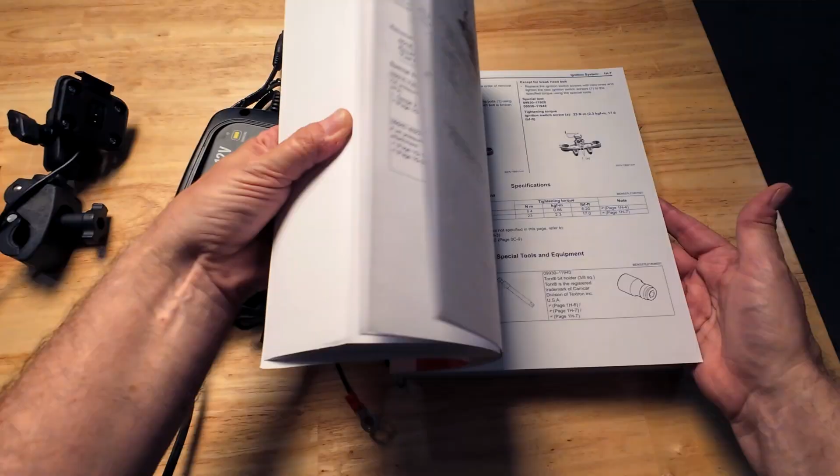First things first, I went ahead and bought the Suzuki manual for the DR-Z4S. Even though it says DR-Z400, this is the manual for the 4S, and if you look through it, everything in there has to do with the new 4S. Not sure why they have that printed that way. It's a $100 manual, but hopefully it's worth the purchase.

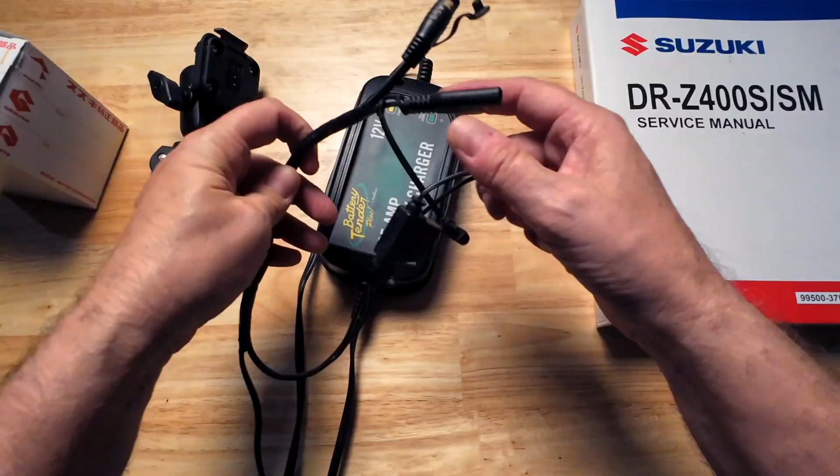Next up, we've got a socket here, an outlet for charging my phone or whatever I want to run off of it. It's going to be a 12-volt DC circuit, and I'll hook that up to the bike, hook it up to the battery, so we got power up front. This connection has two things on it: an adapter that's a power source to my battery tender, and also a power source to the heated gear that I wear. I do ride in the wintertime, and that keeps my heated gear nice and warm.

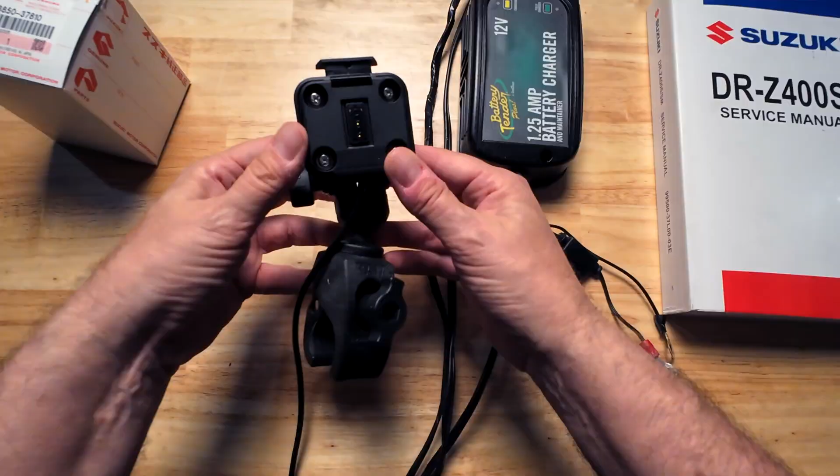Another mount we're going to put on and hook up to the battery is for my Garmin XT Zumo. The thing you need to remember about this mount and the XT Zumo is it's wired straight into the battery, so as long as the Garmin is mounted, it's drawing from the battery, even if the bike's off. So you always have to remember when you turn your bike off, you've got to disconnect the Garmin. It's kind of a nuisance, but I enjoy the Garmin. I know how to use it.

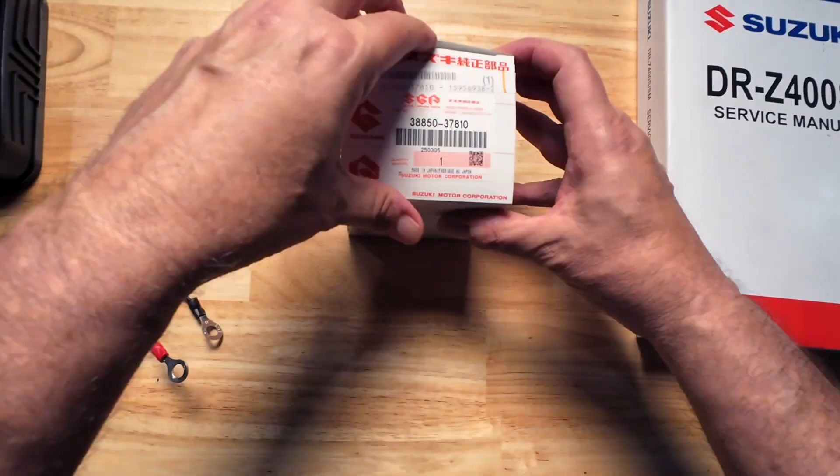Now last here we have what I bought from Suzuki as an accessory for the DR-Z4S, and that's the charging outlet or power outlet. So let's look inside.

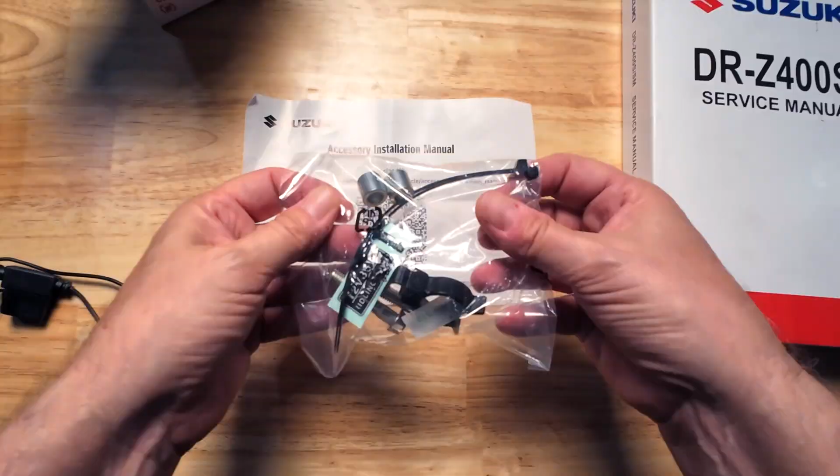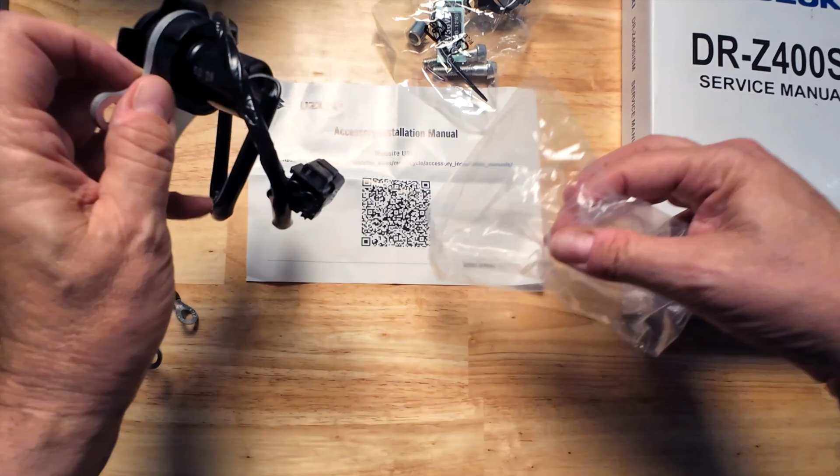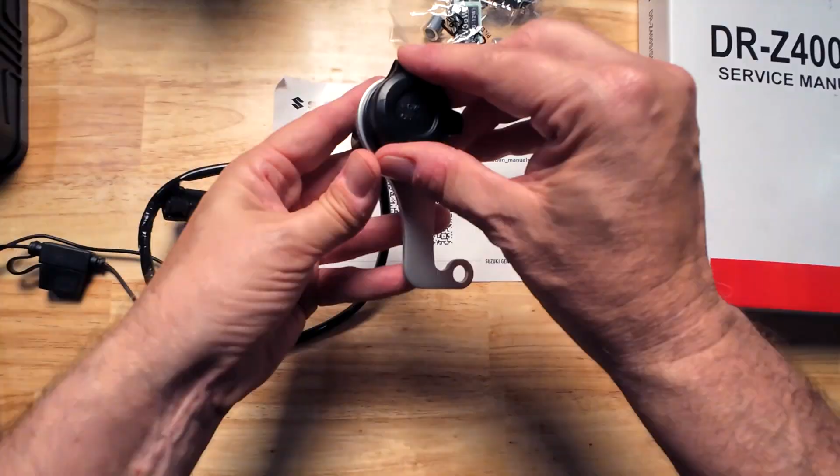Looks like we got a QR code for the instructions. Got a pack here of bolts that are going to go in the riser, and then the actual outlet here, the part you're paying for. This looks like it's going to be a plug and play type of connection. We're going to mount this on the bars. It's just the old school kind of cigarette lighter plug, something in there. It's going to have an adapter that has a USB-C or USB port on it.

Pretty straightforward. So let's go ahead and scan this in and see what we get. So we got a little bit of an issue here, let me show you what happens.

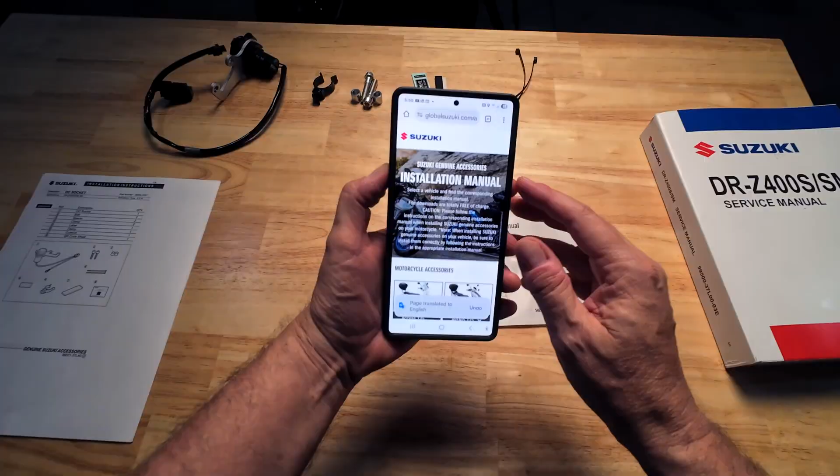So when you scan the code, this takes you to Suzuki's website with the instruction manual, and you're supposed to find the new DR-Z4S. Well, as we go through our list here, there is no DR-Z4S. So something you all might have to do that I did, I had to get in touch with the dealership that sold me the bike, and they were able to get me a corporate link to get to the right information, and then I was able to print out the instructions.

The first page is just going to give us a parts list. The second page is going to show us a little bit about the tools that we need. Looks like we're going to need a 5mm and 6mm hexagon socket.

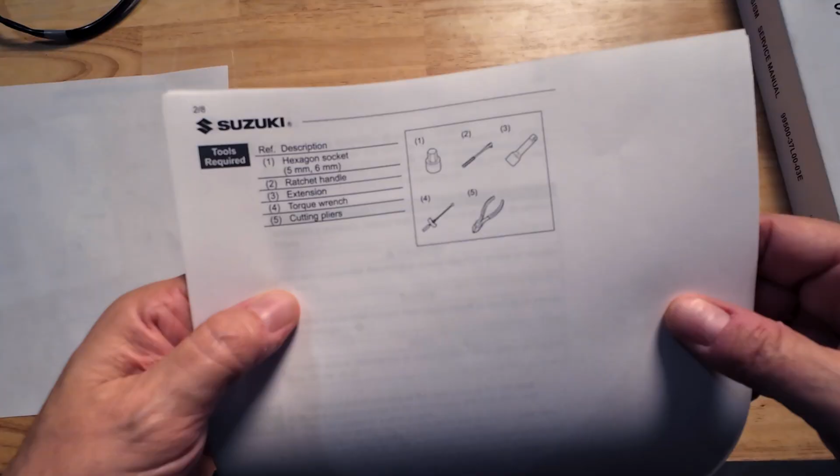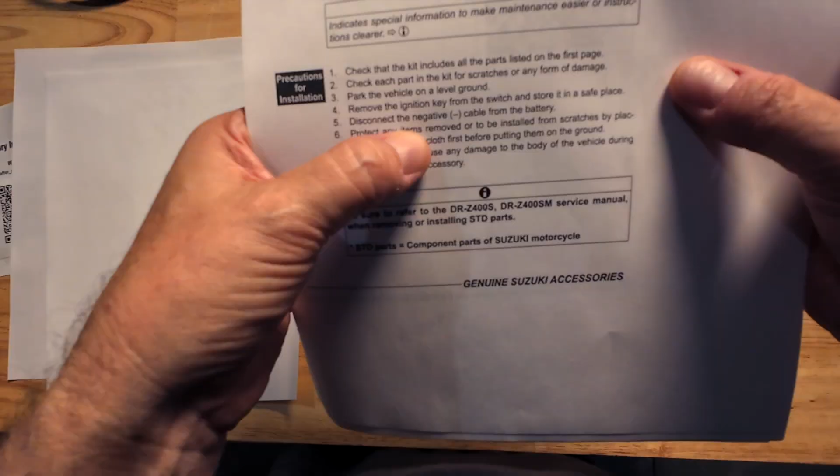The next page is going to tell us to disconnect the negative cable on the battery. I'm not going to tell you that you don't have to do that. I'm doing that because I know I'm going to hook up some other things as well, but that's just kind of a precaution for installation.

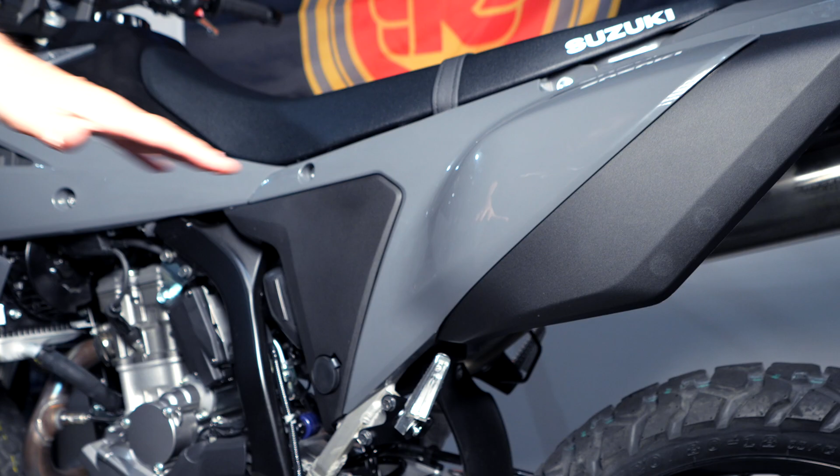So the first thing we want to do is get this panel off and get to the battery. To do that, we've got to take this black panel off. There's a little pull tab here, we've got a key unlock, that just pops out. You can see I've got my registration in this little handy pocket, and you got some tools here. But what it does is it exposes this final bolt.

So you have 3 bolts here that you're going to take this side panel off with. I've got my 8mm socket here, and I put an extension on just because it's hard to get in there. So let's go ahead and loosen these and take these off.

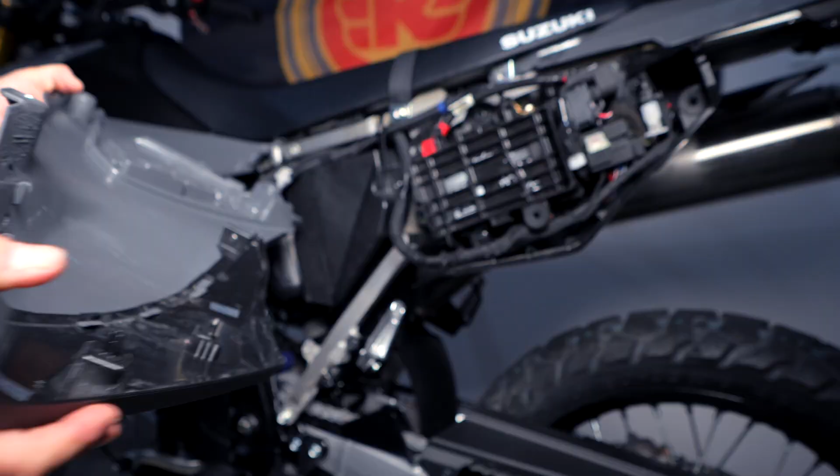So we've got the 3 screws out, and this is still stuck. I looked and it looks like there's 2 little tabs here, so we need to just pull this straight off. It comes out fairly easily, but you can see these tabs here, they go straight in these 2 holes here, and you've got your battery right here.

All your electrical work, your fuse work right there. Some people have got a little bungee cord here that you can tuck wires underneath. I think that's aftermarket, it didn't come on this bike.

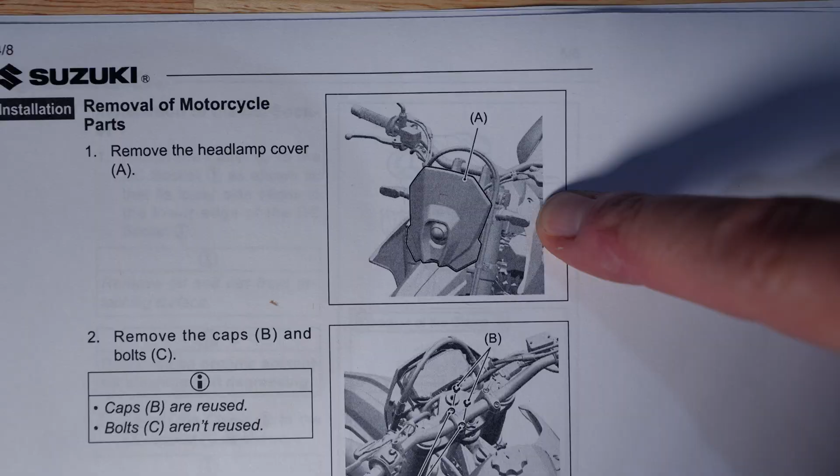Up next, they're asking us to remove the headlight cover. I think we've got 4 screws that attach it. This is why I got the service manual, it's got more information. You can see the headlamp cover here, it's got an attachment on top and then 2 on the bottom. So that'll give me an indication where to look on the bike.

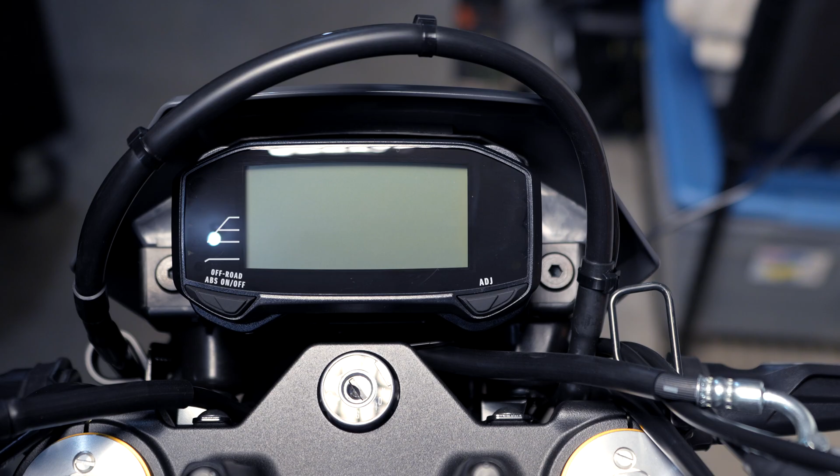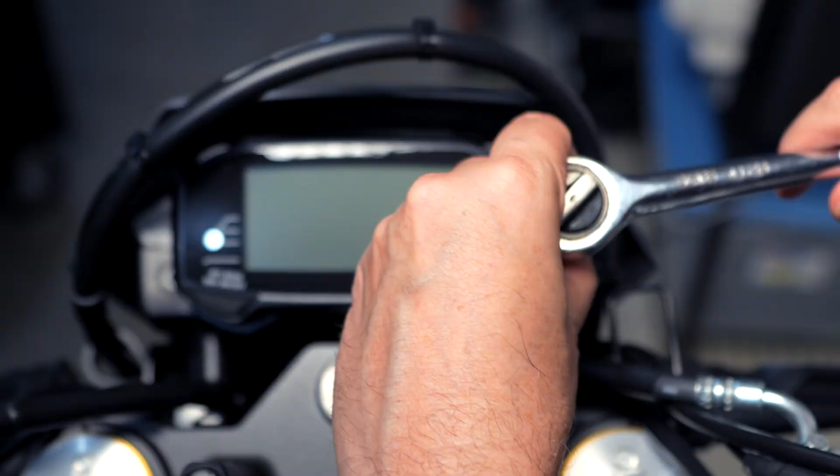So we've got 2 bolts here that we're going to take out, and this is a number 5 Allen socket. We got 2 more to go, one here and one on the other side. And again, this is a 5mm.

This one's going to be a lot easier to take out. They really aren't in very tight. That's going to be a part that we'll probably have to periodically tighten.

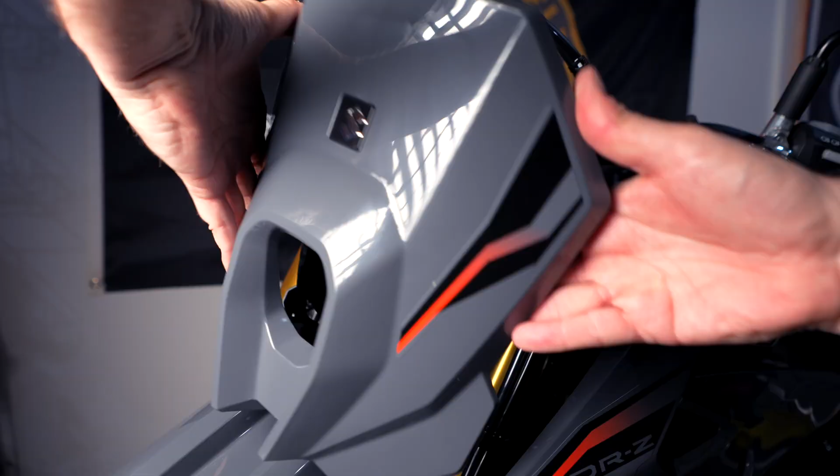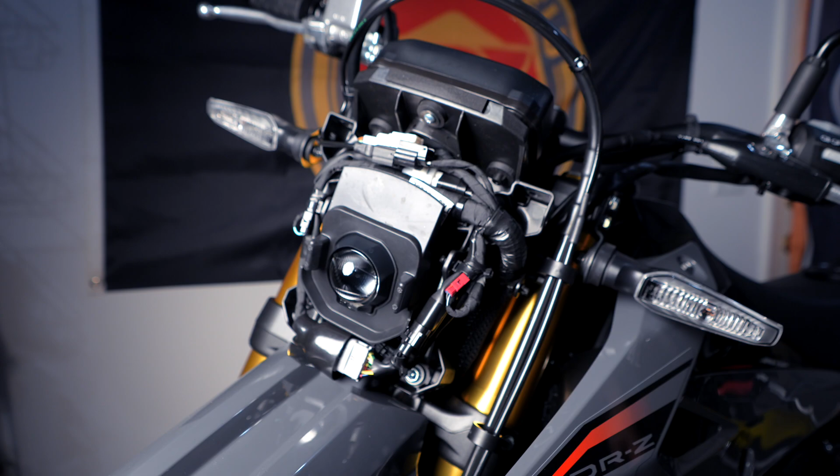Let's see if that just comes straight off. And it does, yeah, just 4 little tabs. Just have to remember where they go back in. But that was pretty simple, straightforward.

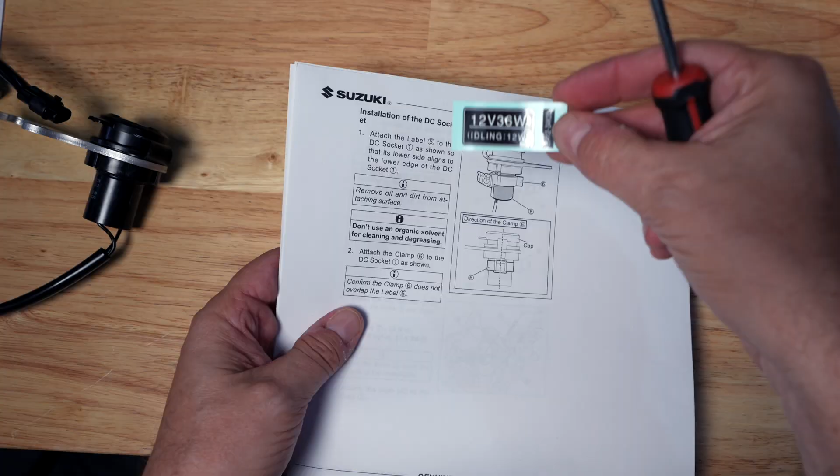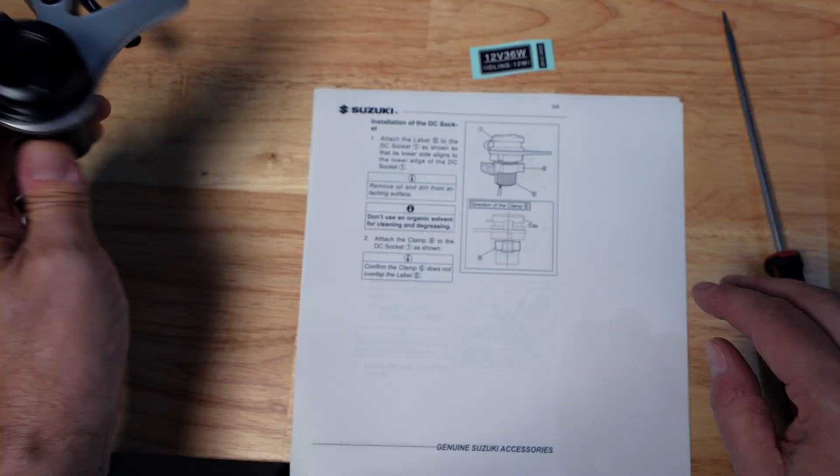Next step, they want us to remove these little plastic caps. We've got a label here saying 12 volt that's going to go right here on the socket, just so we know that that's a 12 volt. And then I believe on the other side, there's this little spongy pad that goes on the other side. So we'll put those 2 on next. So let's follow the diagram and pop this on.

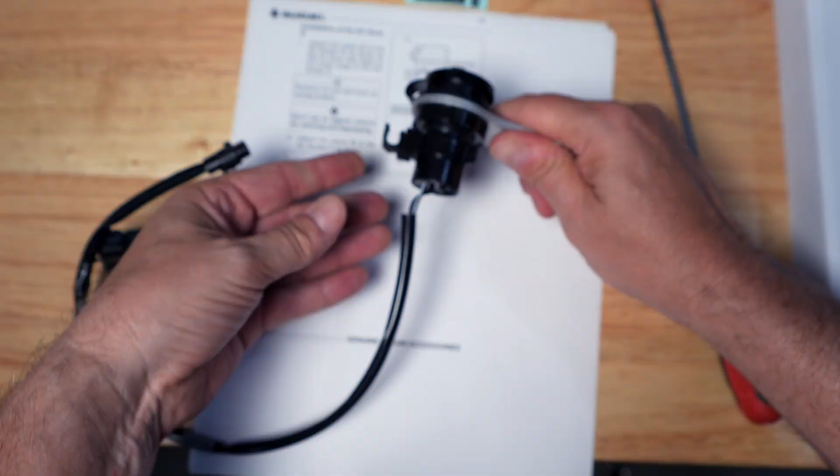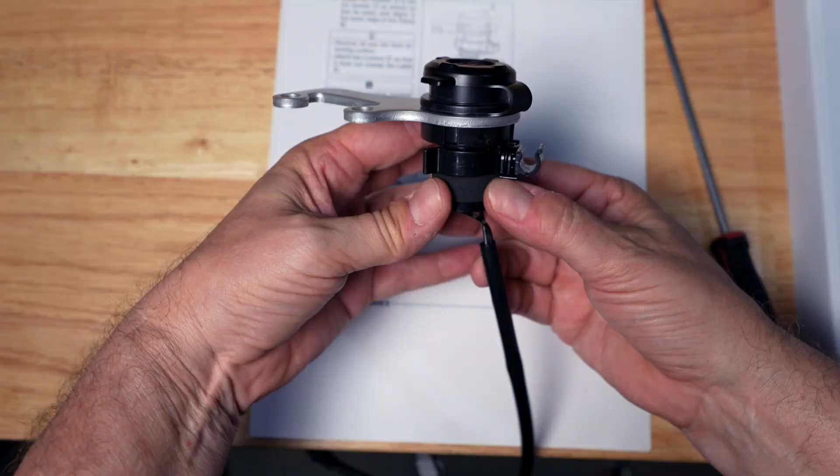Got our label on. Next page, we've got this little rubber sticker, and it looks like we're going to switch it over to the other side and place it right about here. We'll see once we get it put on what that actually does.

All right, up next we're going to install the DC socket onto the handlebar. Here we're going to use a number 6 hex bit socket, and we're going to loosen these 2 bolts here on the handlebars, on the risers. I call them risers, they're just bar clamps.

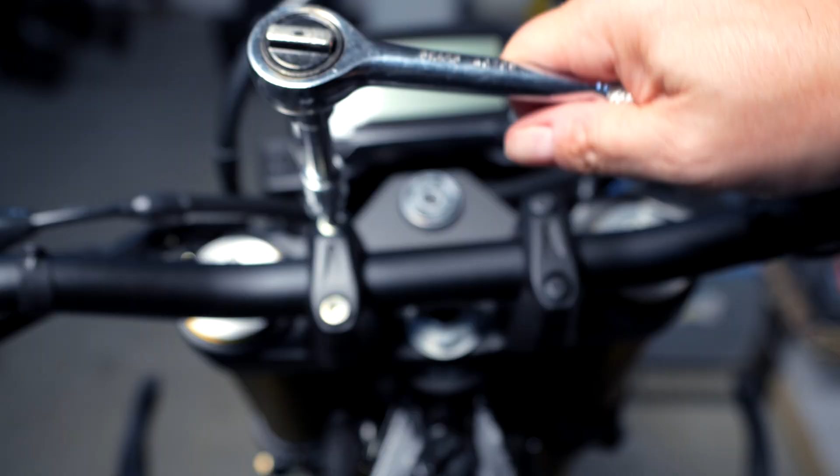Wow, they weren't very tight either. Oh, that one's loose. The other thing is, you can tell there's no Loctite on those. I'll put some blue Loctite on the new ones when I put it back on.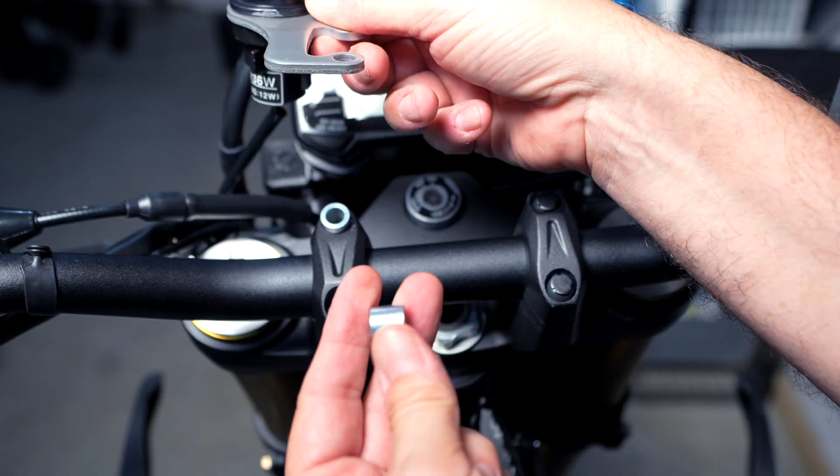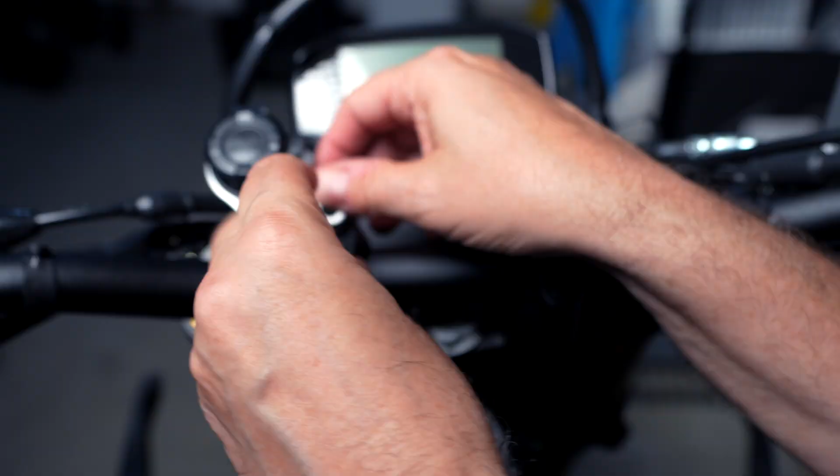So we're going to put these little spacers in, put the bar clamp back on. I'm just going to put one in to hold it without the Loctite so I can get the other one set. See what I've done? You got to look, you got a direction that you got to put it back in. So let's take that back out. It might not matter, but it might.

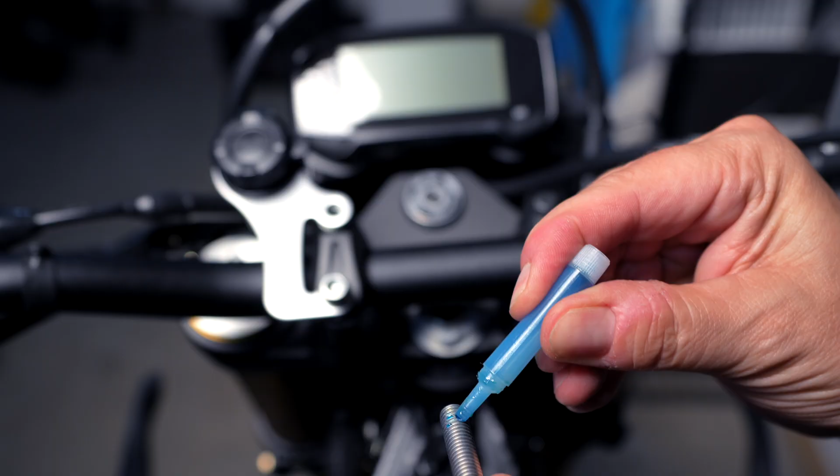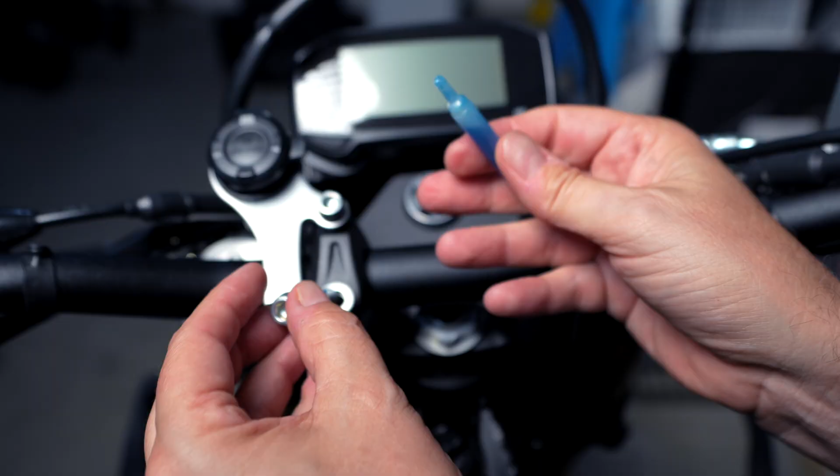Okay, that's there. Here's where I just put a little bit of this blue Loctite on. Doesn't take much. I'll pull this one out. Put a little bit on here. Not going to torque those down yet.

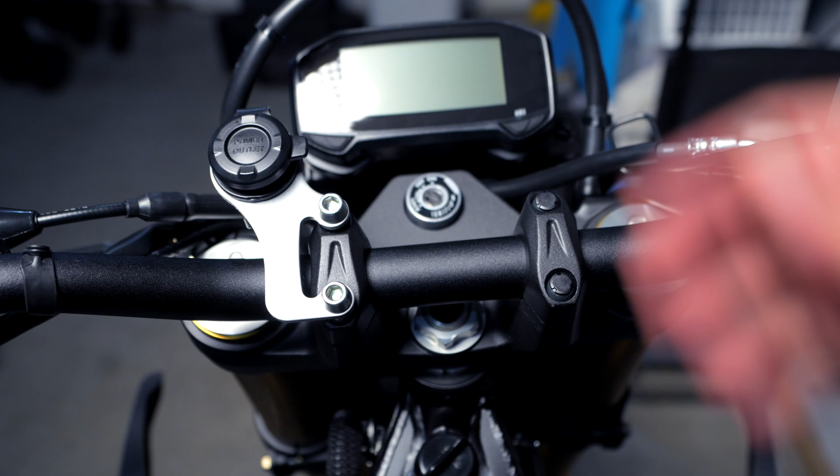I'm going to make sure everything works first. But we got it in place. Let's go feed this wire through where it needs to go and get some power to it. We've got to route this wire through. That fuse is pretty big, so we'll have to see where that goes.

This is what I was curious about. I was thinking that maybe this wire went around it somehow. I wasn't sure what that was for, and then I figured it out that when you open this little cap here, that holds it.

So, do we really need that? I don't know, I guess we do. Maybe it keeps it from flopping around, but that's what that little additional part is.

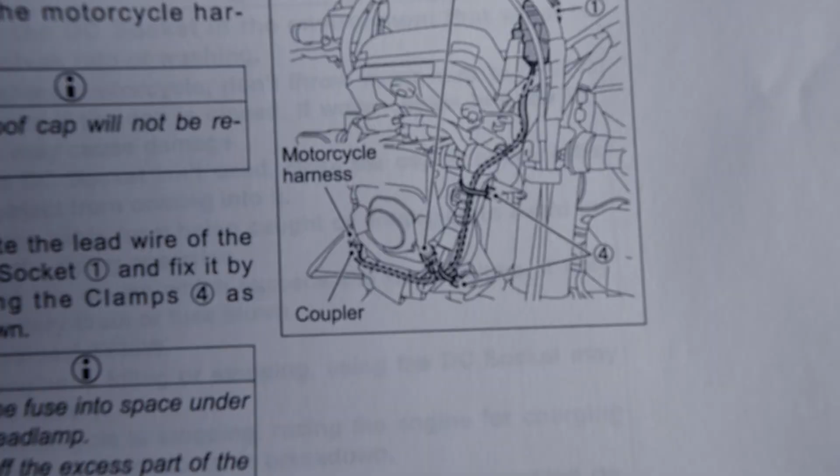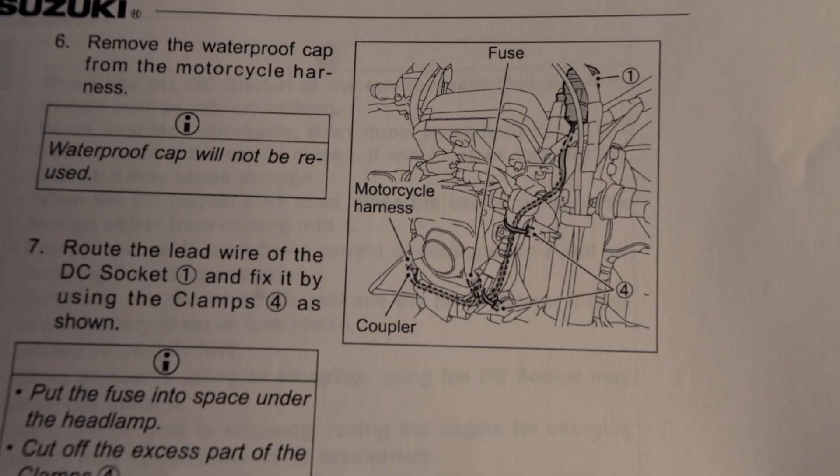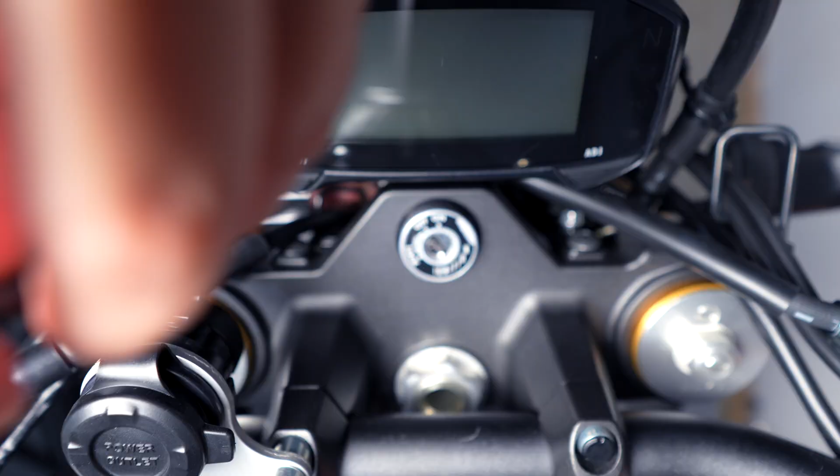I'm going to try to follow their guide, but to be honest it's kind of confusing as to where they're saying to route it. I've got a pretty good idea, though. I think you can figure out on your own where it will fit, where it won't, and the best place to take it for a good tidy appearance. Probably the most difficult part is this fuse is pretty big, and there's a hole going right down through here. Looks perfect for it—I think I can get it through there, and that's where they want you to put it. But I'm definitely going to have to move some things out of the way to do it.

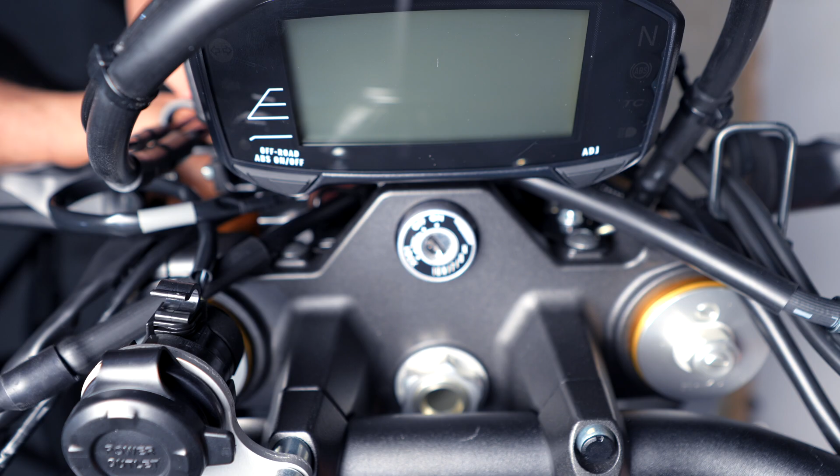I can feel it coming through there. It might have went, actually. Okay, so it made it through that passage.

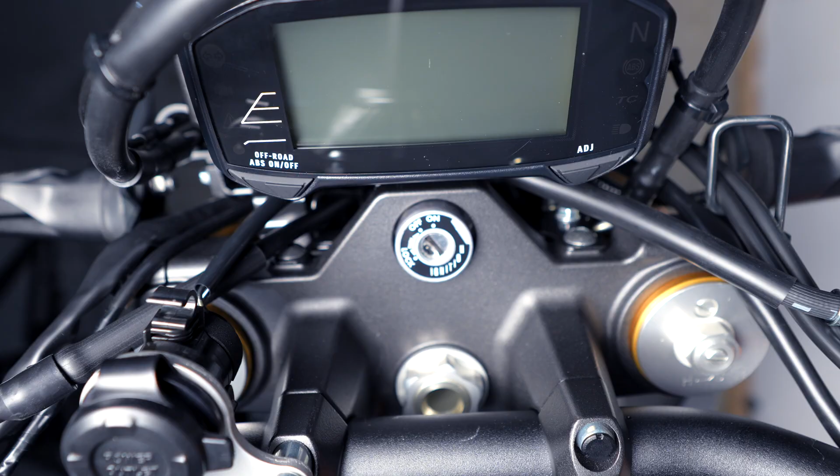I know it looks like a big jumbled mess, but here's our socket. It's running down through here, coming out here—you can see where that's moving. I'll look and see where it goes from there. I'm sure it's going to wrap around, probably go right through here and wrap around to the other side. We'll see—let's move on.

So this is our plug-in right here. It's got a waterproof cap to it, and I don't know if you can see that—there's just a little clip here. Push that down and pull it out, and that's where this is going to plug into. Let's go ahead and plug that in.

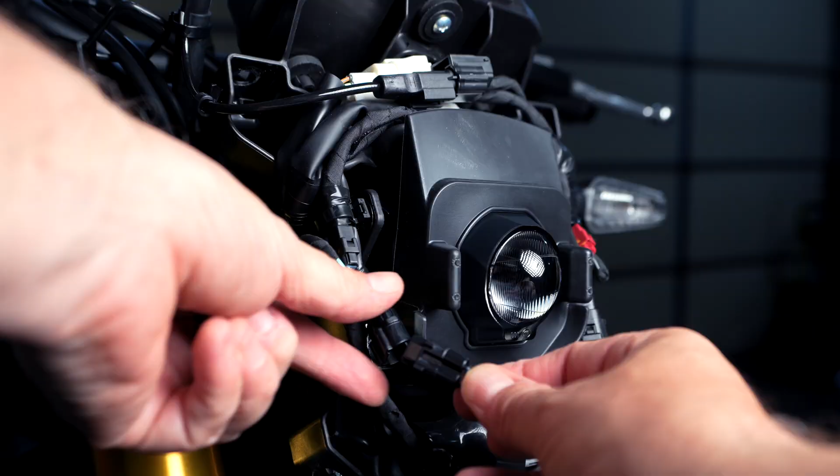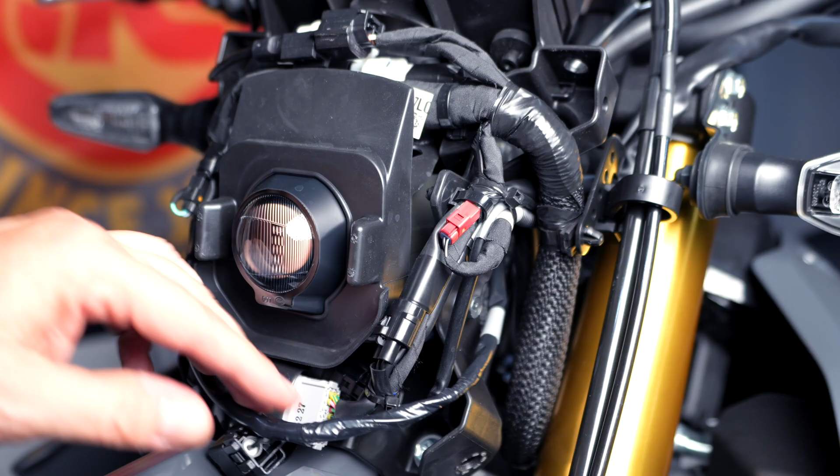Okay, great, so we're all hooked up. Now it's time to just kind of anchor things down. So that's coming through here—I'll probably attach it here.

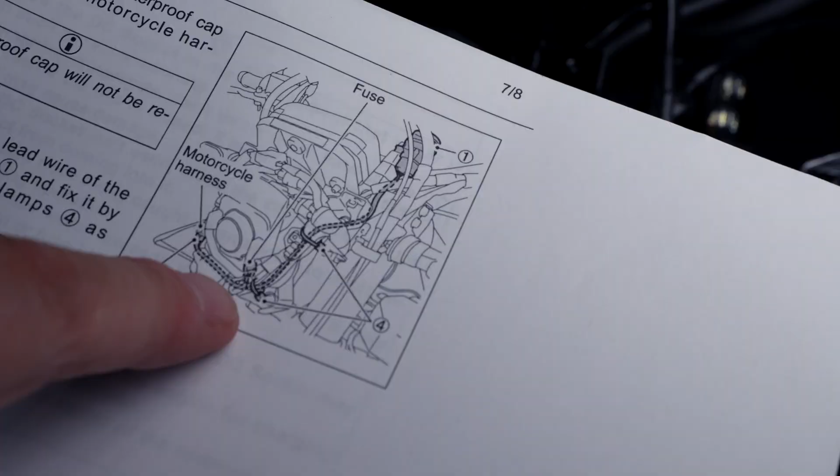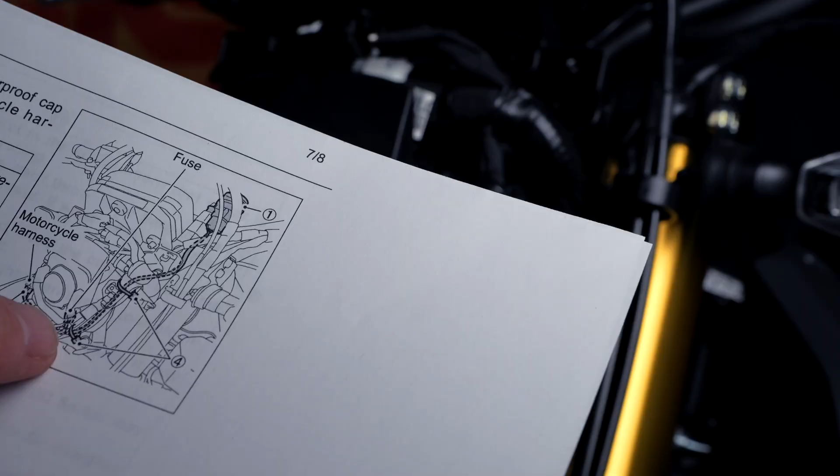Yeah, they show this fuse just sitting in here and tucking under. So you can see this is the fuse, and off to the corner there, right at that bend, is where they see it going, where they're going to attach it. And this kind of just tracks up alongside here, so I'll probably attach that with a zip tie there.

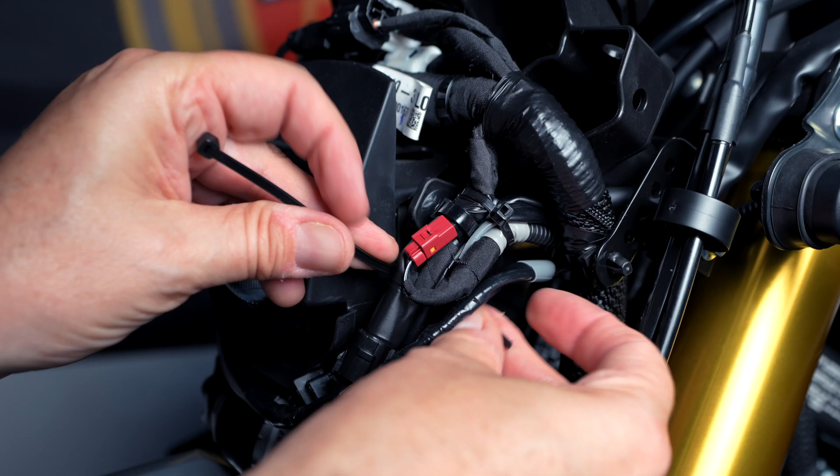So here's where I'm going to go. I'm just going to put this right here. You know, that's pretty secure. I'll put another zip tie over here on this side—that's really secure over there.

This is kind of bugging me here, but that's the way it shows it. I don't want it to flop out down through here. I guess I could put it there, but it just feels a lot more secure if we can tuck it in behind here. I'll do a little zip tie here.

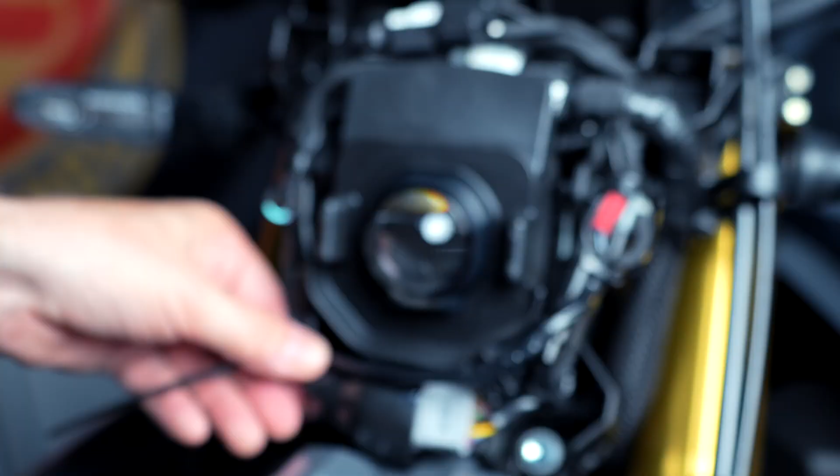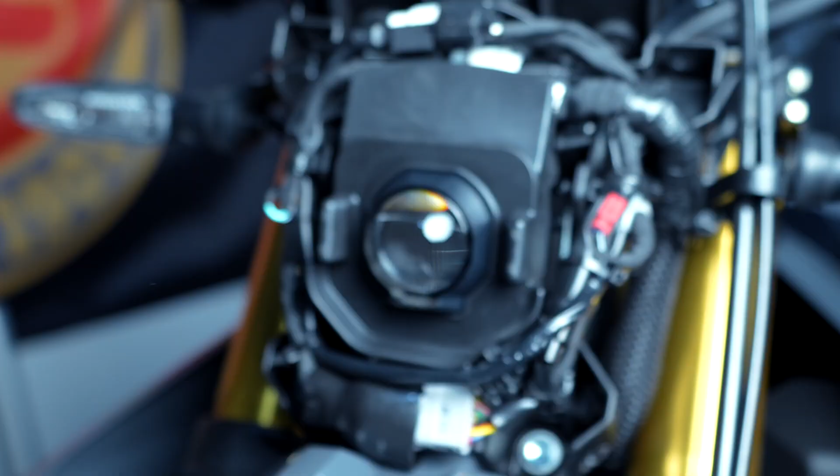Let's trim those off. Good thing about zip ties—if you get one wrong, you can always cut them off and do it again. Now we just need to put the fairing back on the front.

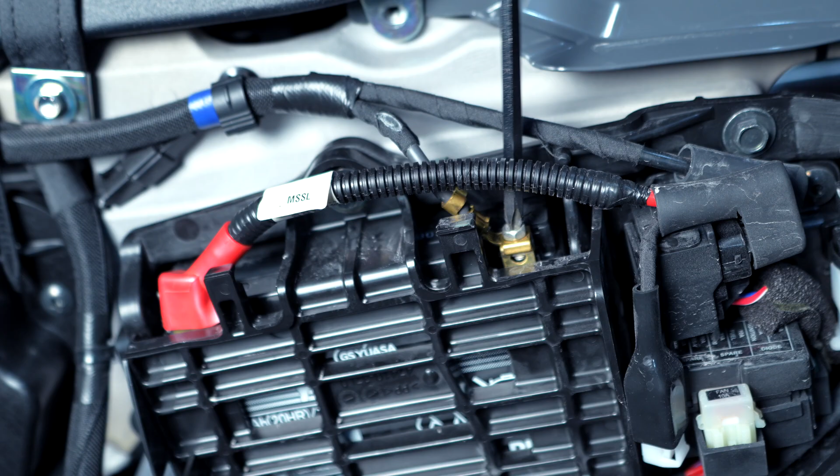But before I do that, I'm going to test it—I'm going to see if we get some power to it. I'm going to do that before we hook up our other projects. Let's see what we got here. 12.8 volts.

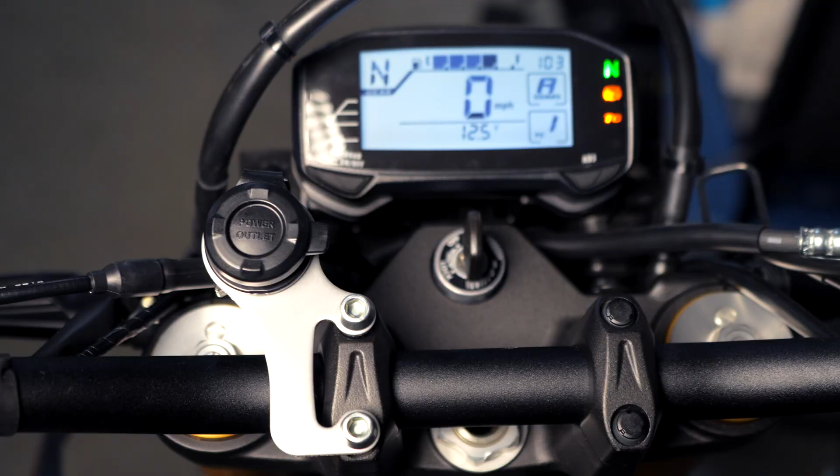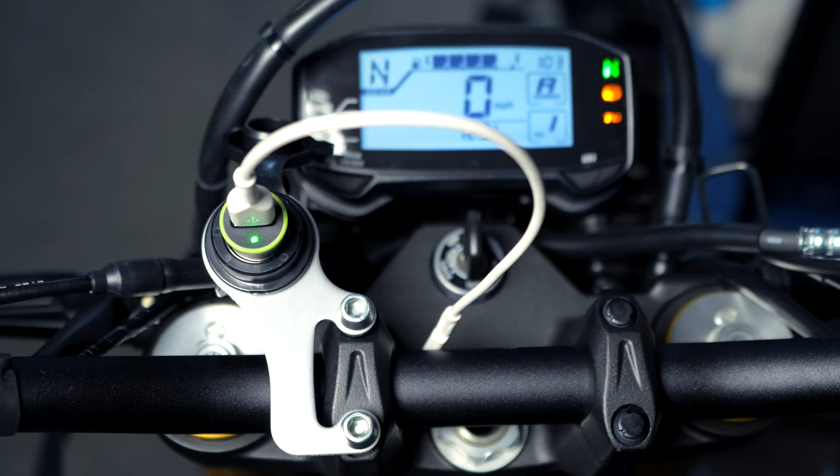Of course, I haven't tightened that yet. Oh, there we go, we got power. Let's see if it'll charge my phone—charging. All right, so we did it right. So let's get things wrapped up on this first project.

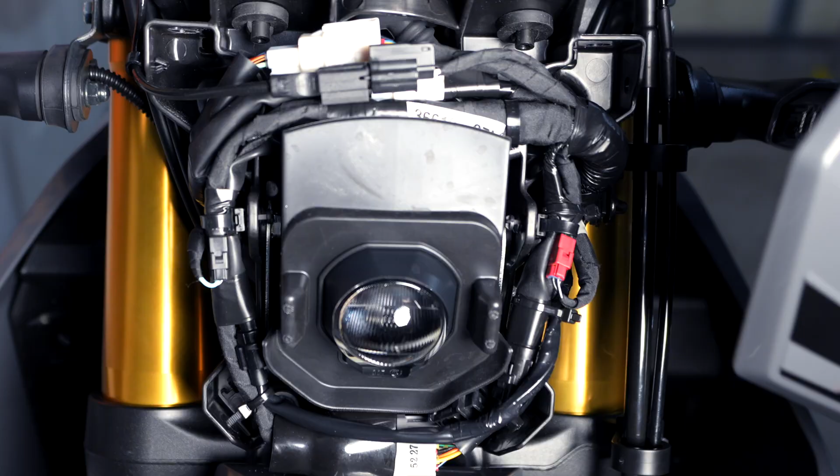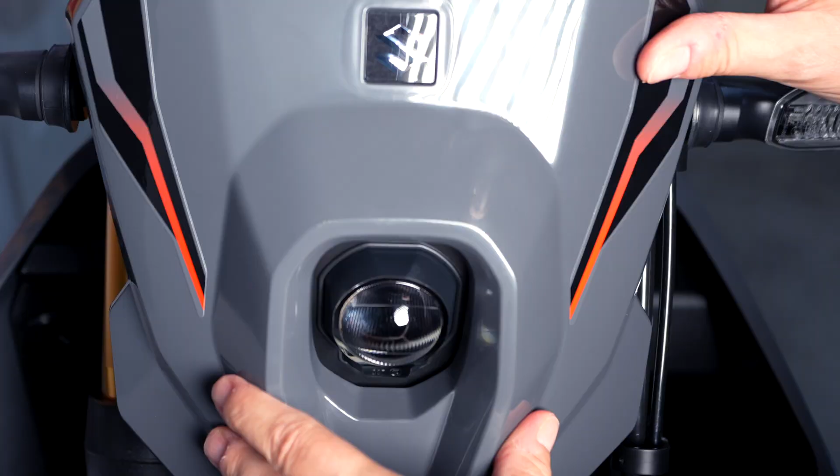Time to work in reverse order now. We've got the socket in place and the wires ran, so let's go put the headlight shield back on. As you look at the front of the bike, now that we have light on it, it's not that difficult to see where these tabs go. You've got a spot here, here, here, and here, and those just slide in, just like this.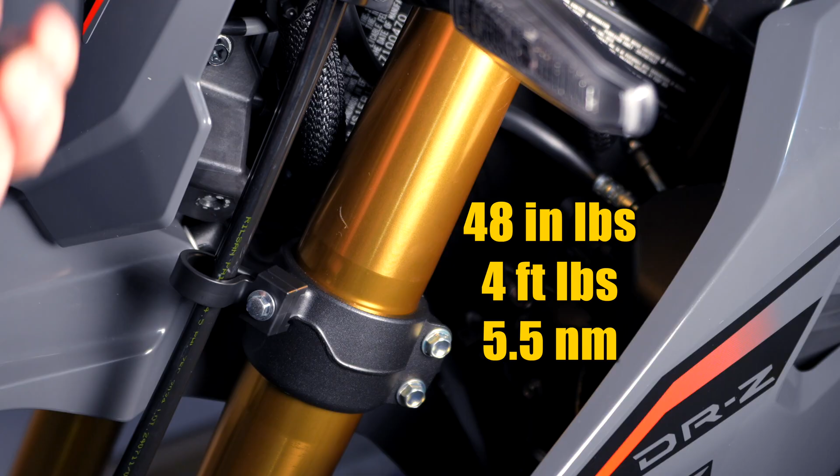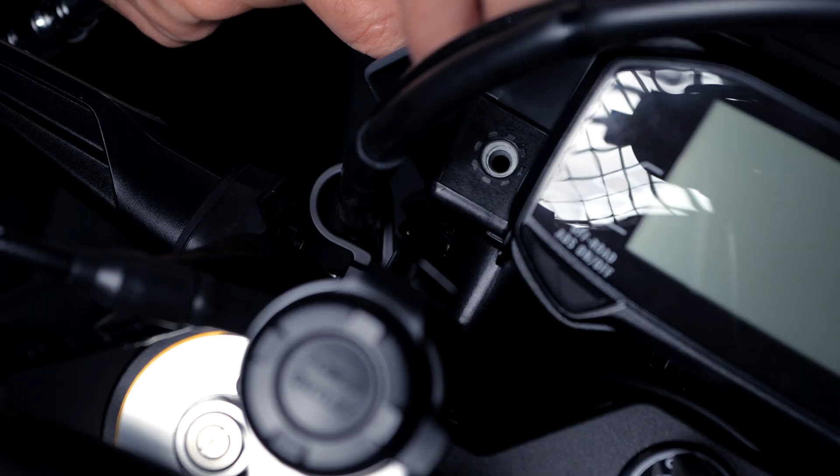Now we'll go around to the other side and put the bolts back in. The bolt that goes back through here is either 48 inch-pounds, 4 foot-pounds, or 5.5 Newton meters. Just going to make them snug for now. Then we've got one on the other side too.

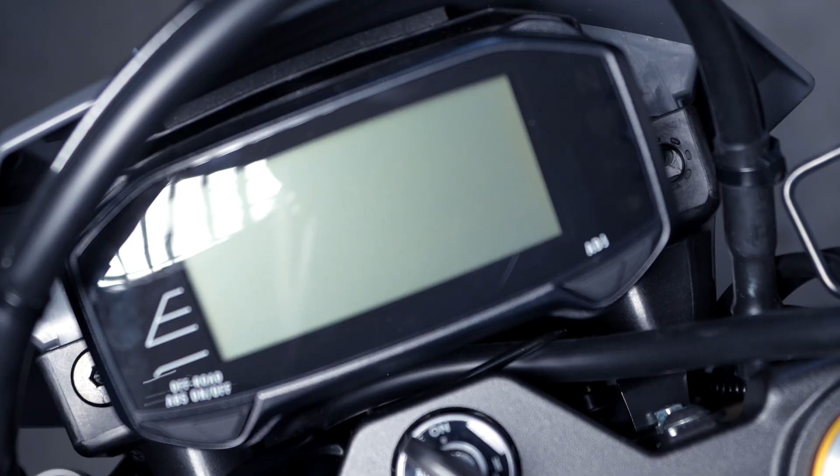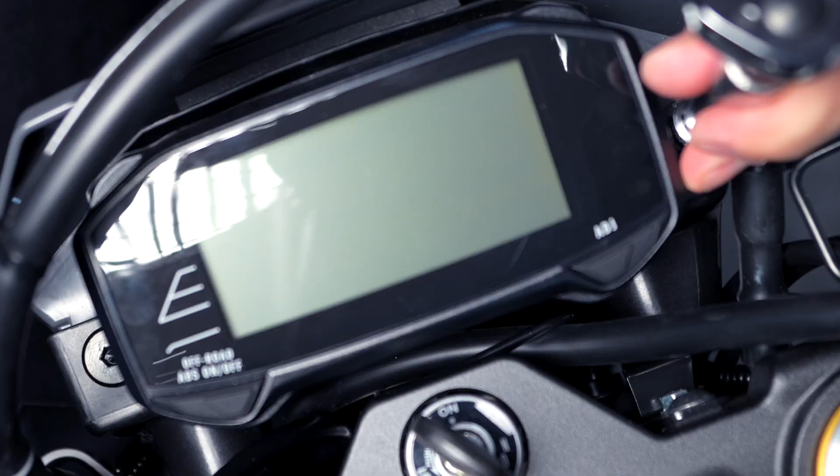Back to our socket. These two bolts get either 17 foot-pounds or 23 Newton meters.

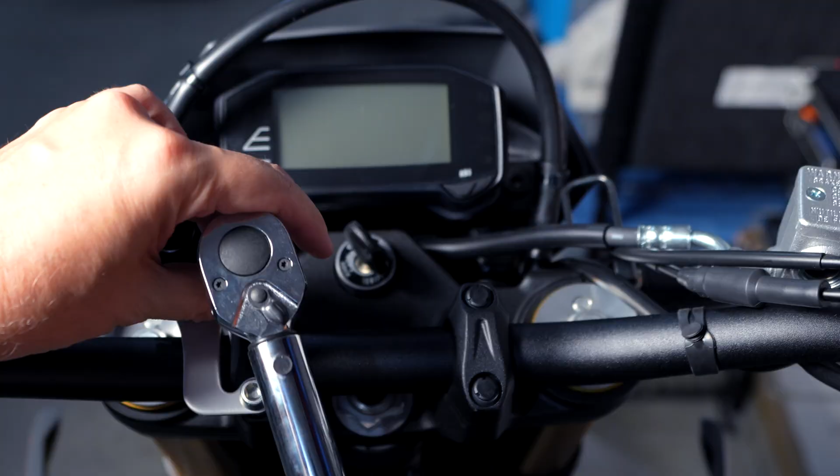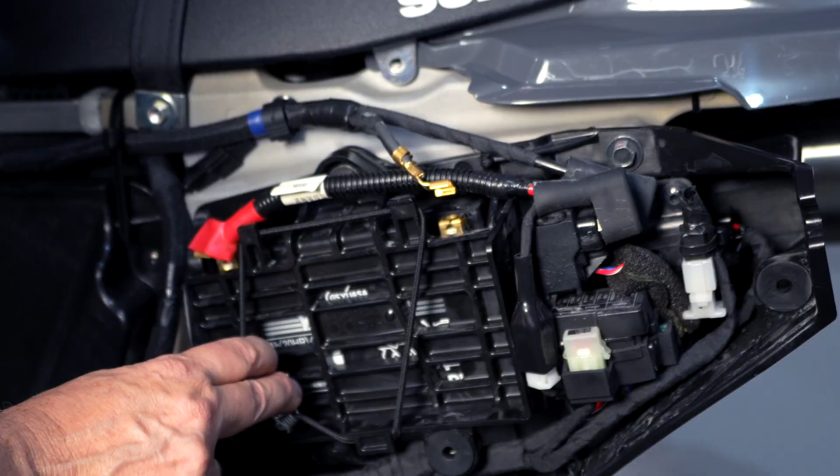Next up, we're going to hook up to the battery the connections for my heated gear and my battery tender, and also for the mount and charging station for my Garmin Zumo XT. I went ahead and created my own little makeshift bungee here. Hopefully these metal parts are out of the way and won't cause any issues. But I'm going to have a lot of extra wires, so they'll fit nice right through here.

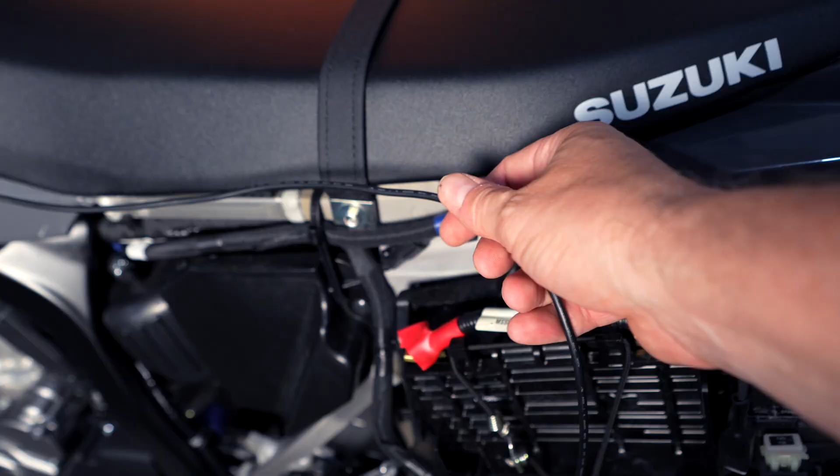I've got my Garmin up here. I'm going to try to thread this wire underneath the side panel, under the seat, and down to the connection. So I'll have to take the seat off, which I think is this bolt. I already undid this bolt here, and I've got another one I'm going to undo right here. Let's go ahead and pull the seat off.

All right, let me show you what I've done. I've gone ahead and mounted the Garmin up here along with my cell phone on a quad lock. But I'm going to show you where I've run the wire.

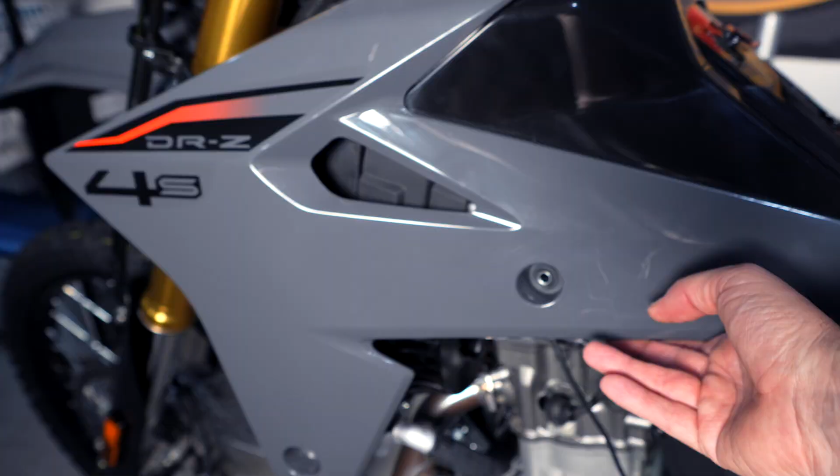It really wasn't that difficult, but you have to take a lot of bolts off and loosen up the plastics on the side. So as you can see, this plastic is pretty loose. It goes all the way across the top here and goes to the other side. I had to take some bolts off here, here, up here, and down here. And we've got the metal gas tank here, but that whole cover is just one big piece.

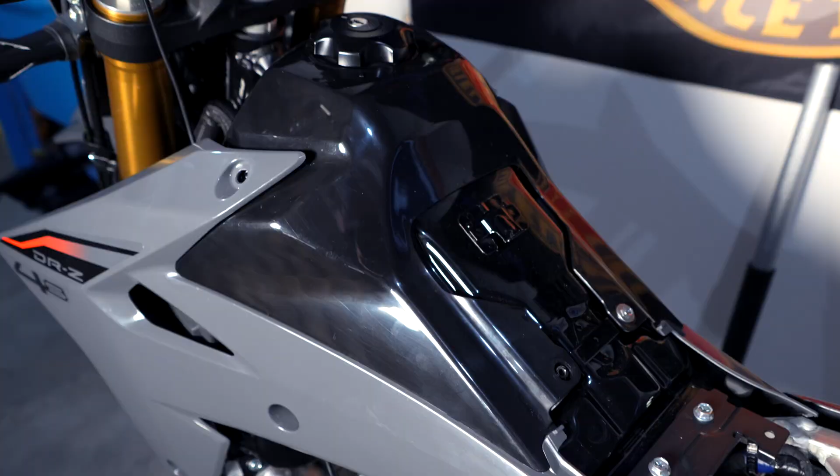But it's given me enough room that I can run this wire back here to the battery terminal. Got all the wires kind of hidden there.

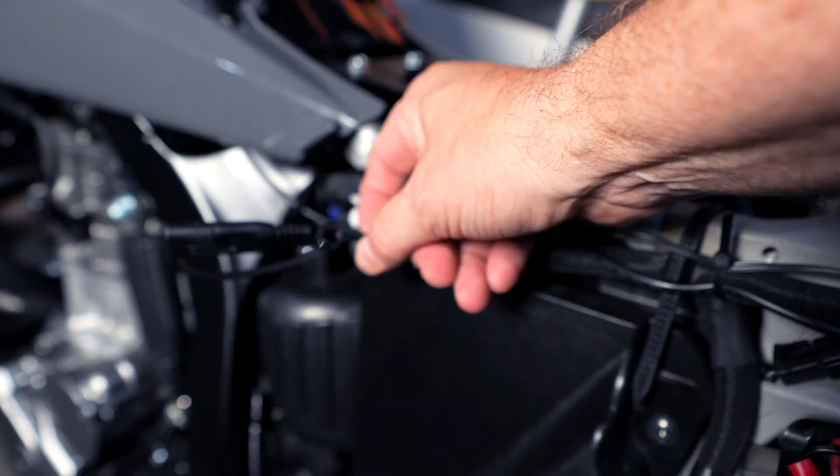We're getting ready to put everything back together. Ran the wires through here. There's my tender. I did take off the heated gear one - it just became too much on this positive plug until I get a different kind of power source. That's okay, it's the middle of summer, I don't need it. So we've got it running up here.

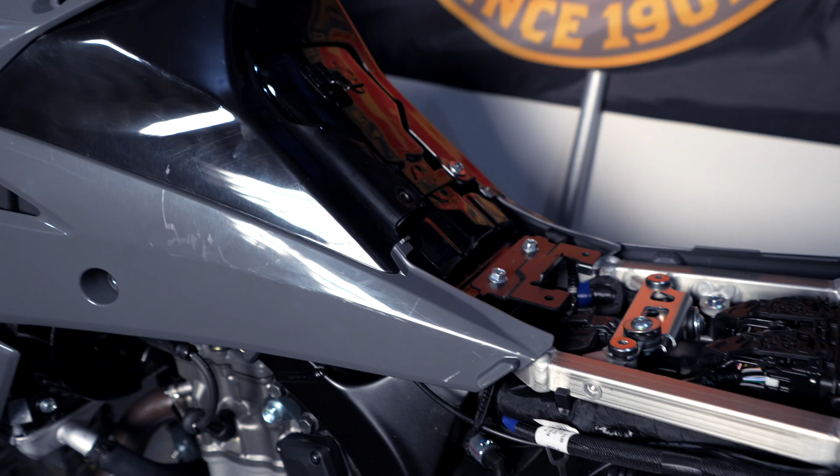Got some power up front. Got power to the phone. Now let's put the Garmin on. And we got power to the Garmin.

When I turn this off, and we'll turn the power off, so the phone's not going to charge and we're not drawing anything off of here. But like I talked about, this Garmin is wired in hard, so it's going to always pull off the battery unless you pop that off when you turn the motor off.

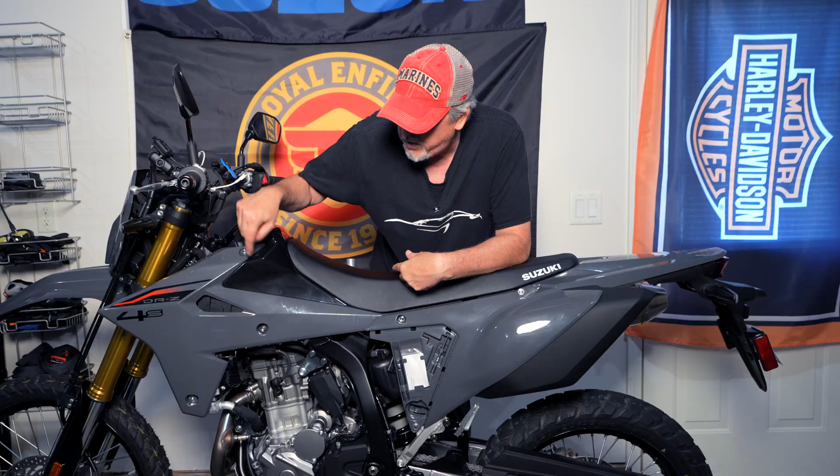Now it's just a matter of putting everything back together. All that's left to do is tighten up the bolts. We've got 1, 2, 3, 4, 5 that get 90 inch-pounds. Then we've got one up here that gets 75 inch-pounds. And then we're going to take a look at the front here of the DR-Z4S.

Thanks for watching the video today. Hopefully it helped a little bit. I feel good about the front of the bike now. I got some power to it.

I like the Suzuki socket. It was an easy install, just plug and play. It's in a good position. We'll just see - once I get bar protection up here, it might get in the way, so I'm not sure how that's going to work out. But at least right now, it's giving me some power to my phone, charging my phone, which is important.

I try to have 2 types of navigation when I'm out, and that's why I had to get this Garmin installed as well. So I use both of them. And I think it looks okay on the bike. You know, it'd be nice if it was all in one center up front here, like some of the adventure bikes, but it's not, and it's not an adventure bike. It's going to be more of a dual sport, but I'm going to push the limits of it when it comes to adventures.